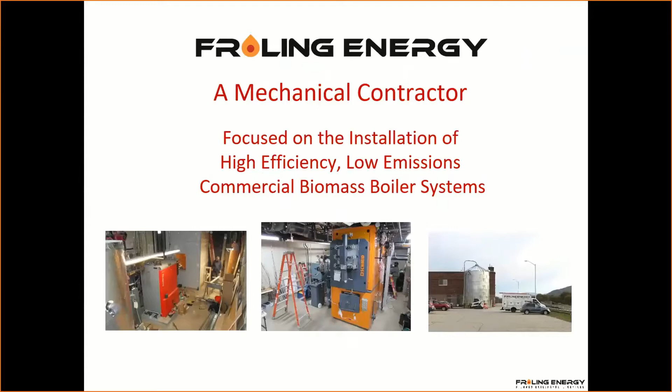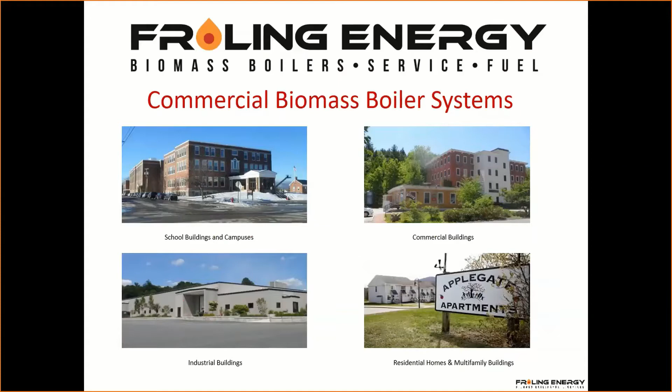Wanted to tell you quickly about us, that we are a mechanical contractor focused on the installation of high efficiency, low emission commercial biomass boiler systems. Those are generally of the larger size systems. We often put in residential systems in the course of a year, we'll do 5 or so, but we tend to do 5 or so big projects like some of the things you see here. We tend to do a lot of school systems, a lot of school buildings, going into their boiler rooms and renovating completely, pulling out old boilers and installing biomass. Sometimes we're adding other equipment, and sometimes we have to build a building for those boiler systems. Commercial buildings, industrial buildings, multifamily buildings are very popular as a good place to apply this kind of technology, because we're generally talking a big boiler that provides heat for a number of different locations. On the other hand, residential or individual small buildings are very popular for the pellet boilers, which we'll talk about today.

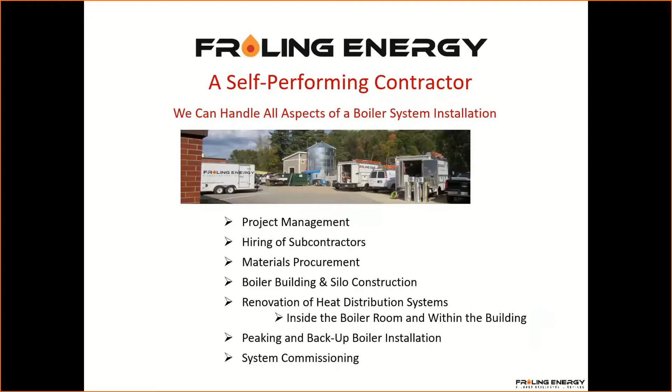We're a self-performing contractor. We can handle all aspects of a boiler system installation. You can see in this picture here, we not only put up the silo and put in the boiler, we built the building and then we put the pipe into the building because this didn't have any room in the boiler room. So those kinds of things, including hiring of subcontractors and getting all the materials in place, going into that boiler room and doing the demo and replumbing everything. It's a big project, and this is the kind of thing that we do. We wouldn't do an addition onto your school and the boiler, we would basically just want to do the boiler and maybe the boiler room. So we're focused on that sort of thing. Another thing is technical consulting on biomass boiler systems.

Anytime you have, if you're an engineer, a designer, or a building owner, a facilities director, you want to just understand what's possible for your building.

We're very happy to help you with feasibility, do a site visit, help you with the design, estimating it, finding out if this is a viable thing, and talk about the payback on this. What's the ROI? Does it make any sense? The value engineering side goes along with that, where we're trying to make sure it works, both financially and physically functional.

Help you with specifications, grant applications, is another thing. Very often we're aware of different grants that are available, and we're happy to consult with you about that and assist you in getting those.

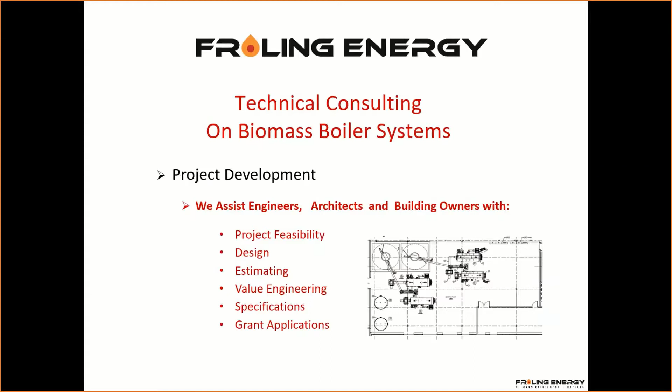We're also, besides being a contractor, a manufacturer of PDCs, which are precision dry wood chips. What we do is take in chips from the woods. A lot of foresters out here have low-grade wood, they select out the bole wood, and we take it in and screen it, bringing it down to a size about the size of a matchbook, and then we dry it. We have a belt dryer, a big industrial belt dryer that brings it down to 25% moisture.

And then we can load it into our big blower trucks, which can blow it up into these above-grade silos. And that's the advantage of the dry wood chips, it's in between pellets and green wood chips.

The system can be costly, but actually if you were going to do it with pellets, it's not that much more expensive than a pellet system of similar scale and multi-million BTU size, which is what we typically work in. That's the scale you'd need to be able to cost justify the change to a dry chip system.

There's a lot to talk about there, and we've got videos about this. It's just something that we found as a niche, and we've really developed it here with some 20 customers now that are offsetting over 600,000 gallons of oil every year using our dry chips. So we're pretty proud of that.

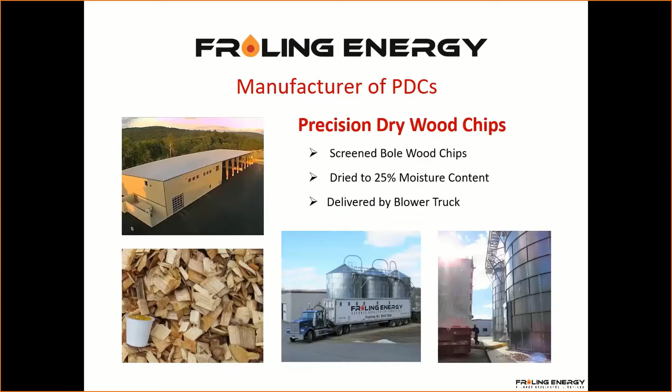That's not big compared to the number of people burning pellets in all different situations. I'm sure there's a couple million gallons of fuel oil that are no longer being burned as a result of people putting in pellet boilers. And nobody's put in more pellet boilers than Maine Energy Systems, so I wanted to introduce Jared Mullen, who's going to tell us all about that.

Jared is the Vice President of Business Development at Maine Energy Systems. We call it MESys, so you see that a lot around - it's a nice, easy way to say it. He's a graduate of the University of Southern Maine, where he studied business, and he spent many years on the sales of MESys boilers at the Maine company. One of his most significant achievements was overseeing the installation of over 150 boilers in Berlin, New Hampshire, and Farmington, Maine, during what they called the Model Neighborhood Project, a partnership between them and the Northern Forest Center. They were encouraging and stimulating that market, getting these out in the field, and that was a wonderful start, a good number of years ago, on getting people to really accept this as a way to heat their homes.

He's also been a committee member on the Northeast Biomass Heating Council, and he's been burning wood pellets in his home since 2006, when he began working solely with those pellets in his house. He enjoys spending time with his wife and three children, and is very active in his church and community.

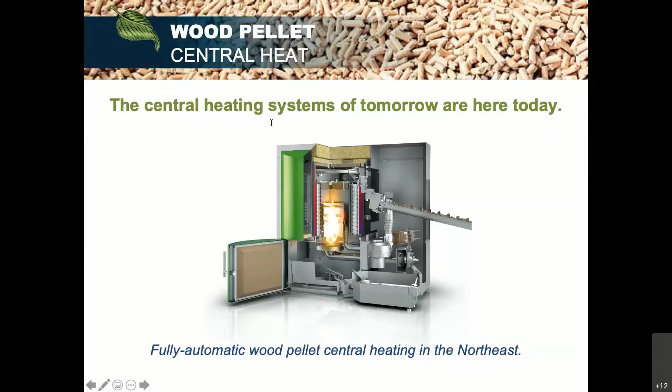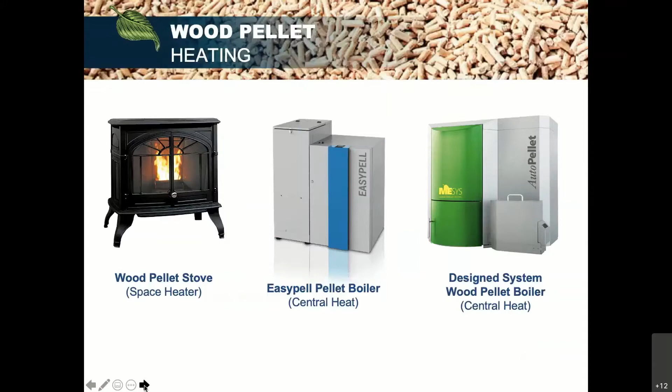Pellet heating started off, and most people think of stoves and other different types of equipment. As we advance the slides here, bear with me. Pellet stoves, we've got space heaters - that's what the majority of people in the marketplace are familiar with. We also have hand-fill units, and of course the designed wood pellet central heating systems that we'll talk more about later on.

Like I said, most people are familiar with these - just a space heater, dump bags. Usually when I walk into a room or give a presentation, like Jim and I have done so many times, most people are asking us about this because it's their impression of what pellet heating is, because it's what most people are familiar with.

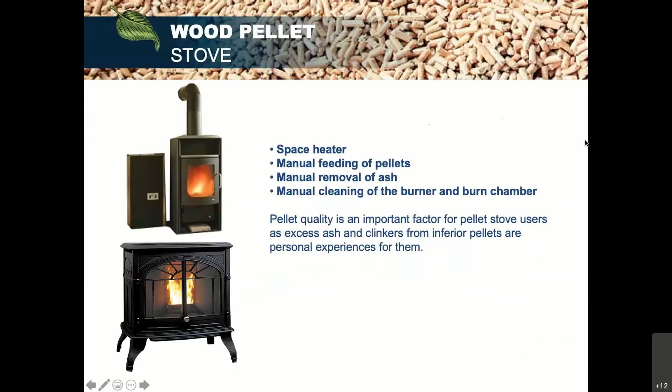We do have a step up from that here at Maine Energy Systems. We have what's called the Easypell. Not a space heater, it is a boiler, but it is something that you would dump bags into, similar to a stove, and then it has manual cleaning and some manual things. So the unattended use period of time is not particularly high, above that of a stove, but not as great as the boilers we have that are fully automated. But this is a good fit - a lot of people find this far easier than cordwood, and think it's a good alternative to going fully automated.

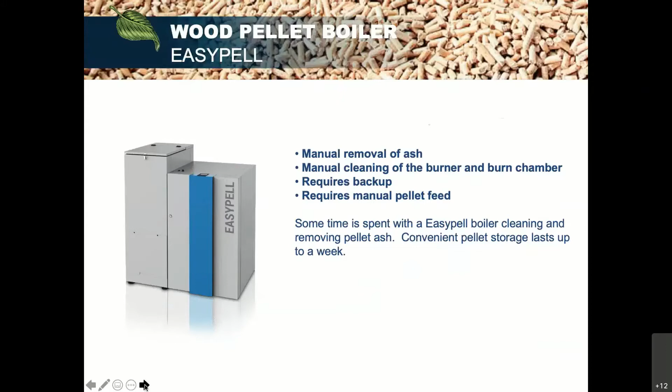But we do have systems that are designed all the way from the boiler to the bin, and we're not quite as easy as a liquid fuel, but pretty darn close, where trucks are delivering fuel just like oil and propane. You never have to see, touch, or handle pellets, and there's just a little bit of ash that needs to be removed, but they clean themselves. There's no scraping or shoveling of ash, and of course they can be installed without a backup.

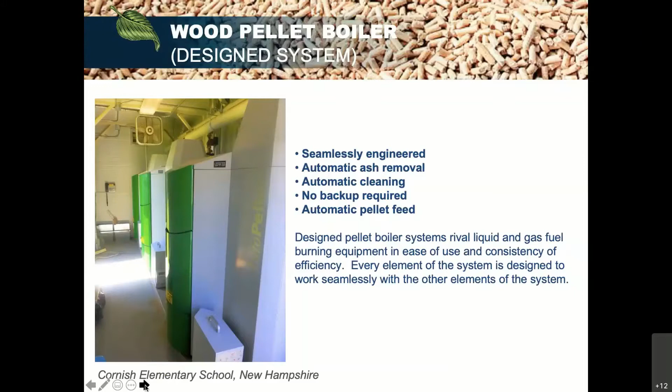These are the bins I've been talking about, pellet storage containers. We offer so many different sizes to help accommodate different houses, different commercial spaces, schools - different places to put these bins so that they can be fed to the boiler automatically.

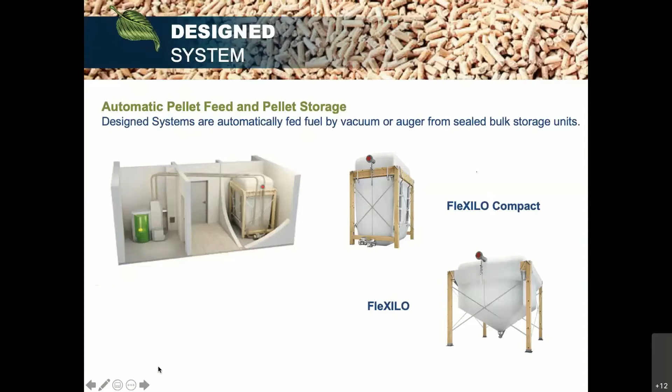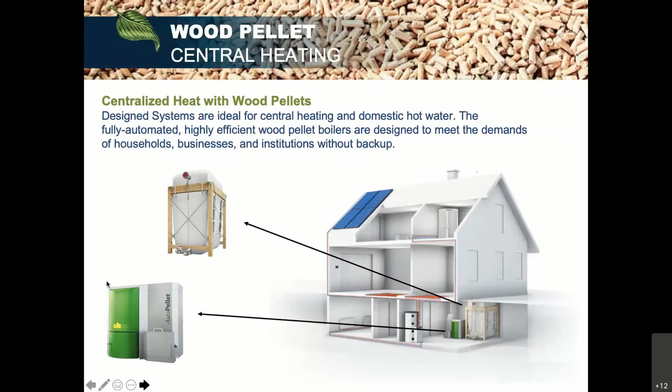This is just showing a diagram of the flexibility of these things in a home. Again, we are typically a residential unit. As we'll show a little later in the presentation, we do have some versatility for small commercial and industrial applications, but when people think of the Maine Energy Systems boiler, we've been most popular by far in the residential market. So you've got your pellet boiler down in the basement with your pellet storage. They can handle radiant flooring, radiators, domestic hot water, and meet the demands of any home without requiring a backup.

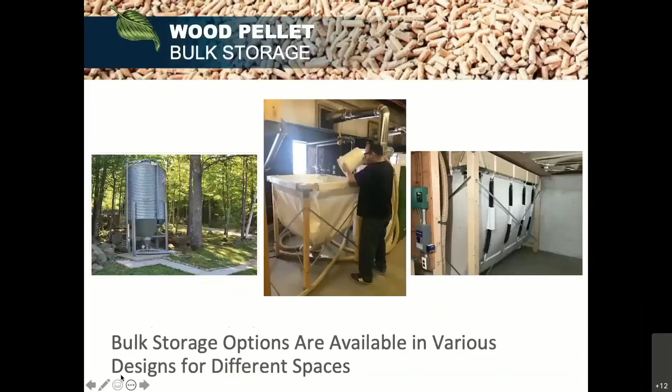That operation, we are on truck number 10. We've been doing that since about 2009, 2010 is when we've had trucks rolling on the road.

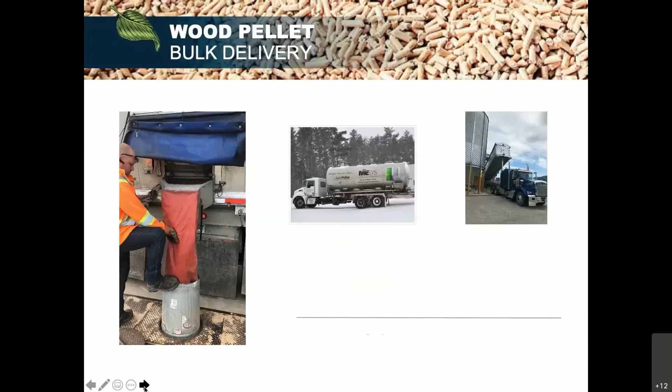There's lots of pellet mills up here in New England, in the Northeast. You kind of see them all over the place. That's a question we often get asked, about how the supply of pellets is stable, and as you can see, we've got a lot of different places to draw from. Us in particular, we mostly get ours out of Strong, Maine. That's the closest in proximity. Keep it local. We also have a pellet delivery depot down in Massachusetts that gets their pellets out of Jaffrey, New Hampshire.

Another example of pellet delivery, and there we have one delivering right to a silo. Some things to keep in mind when designing a system that is going to accept bulk pellet delivery: we do carry 90 feet of hose on a truck, so you're going to want to put fill systems within 90 feet of where the truck can pull up and drag their hoses.

The pellet hoses certainly weigh more and are a little harder to move around than oil hoses, so as close as we can and as easy as we can, in places that are well shoveled or protected from kids if we're at a school site or something like that. We can go 25 feet of rise if we need to deliver pellets, and we have standards that have helped streamline things so we can make this a little easier on our drivers and on those who are receiving fuel.

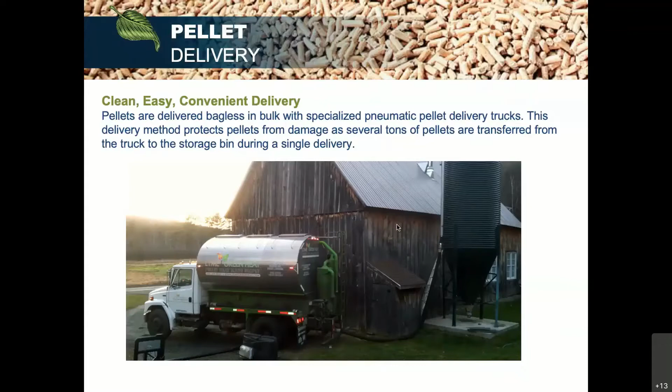We do have certified scales on all of our trucks, so although bins and silos are typically measured in volume, we actually deliver based on weight. Pellet density does vary from time to time, but typically we see it average around 42 pounds per cubic foot. We weigh the truck before and after, and we charge by the pound. So sometimes your bag or silo may look more or less full than another time, depending on the density of the fuel, but it's usually pretty consistently pegged between 40 to 44 pounds per cubic foot. We have certified scales that will tell you exactly what we sent you.

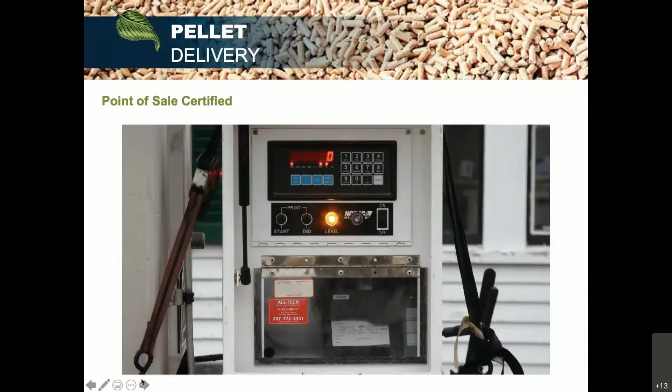I think we have a video here, if that will pull up, of us delivering. A lot of people haven't seen it. I think this one in particular illustrates one of our fabric bags.

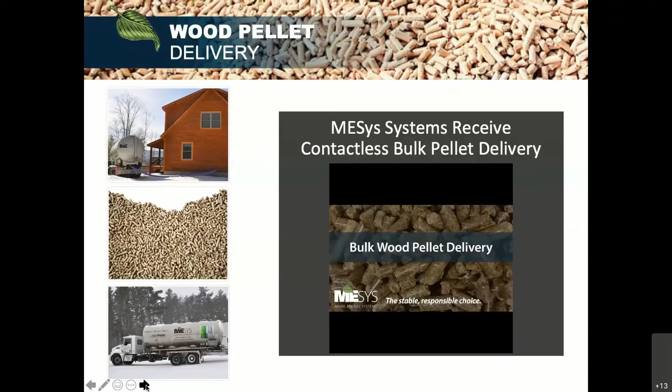So we have obviously different types of pellet delivery, and some are better than others. These design bins would be best. I'd say a silo would be next best, and then anything handmade that people tried to construct on a whim are probably next as far as reliability. So with these we've had the most success, right behind that a silo, just barely behind in reliability. You can see that bin, and what you can't hear is it sounding like a rain stick as the pellets are delivered into the bin there.

We do Maine Energy Systems. We initially started off as a direct importer, then we bought the licensing and manufacturing rights, and we are assembling equipment right here in Bethel, Maine.

We're getting stuff from all over the place. Typically the heat exchanger is coming from Pennsylvania, electronics are coming from Texas, and other componentry is mostly still coming from Europe, but we are putting them together right here in Bethel, Maine, and of course fine-tuning and Americanizing every piece of equipment that goes out the door.

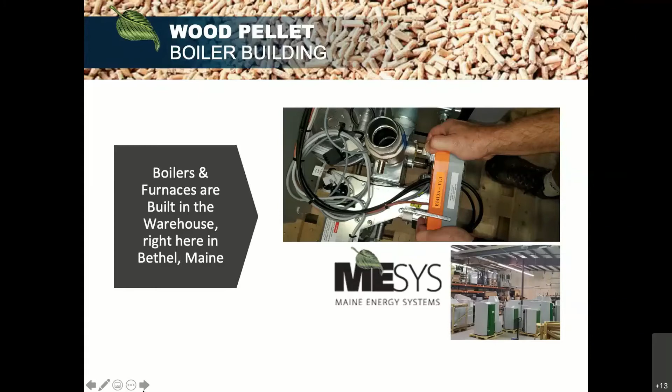We have several different models, and of course boilers and furnaces. That's part of our new line there that does hot air.

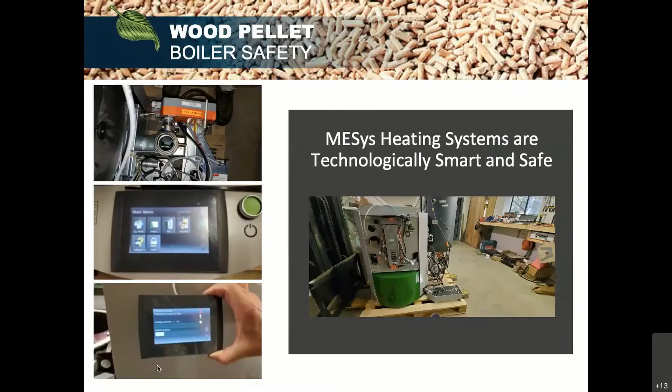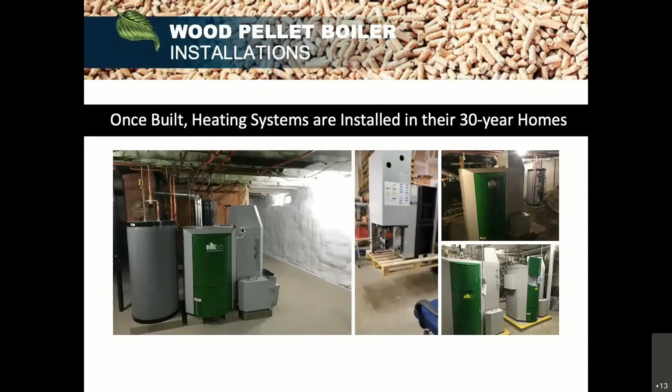Bear with me here just a moment. Oh, what's going on here? We are having problems connecting to the network. Bear with us just a moment here. Is that going? There you go. Got it.

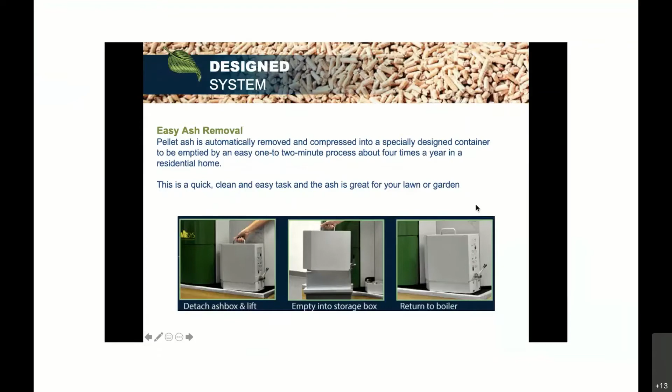And it did advance there. One of the things we talked about earlier was the convenience and similarity to liquid fuel. One of the byproducts, of course, of burning wood is ash, so that's one of the differences we have, and a little less convenient. But everything gets compressed and augered into an ash box that is very handy. It is external to the boiler, which makes it really nice and easy to dump and dispose of in an easy process on our systems.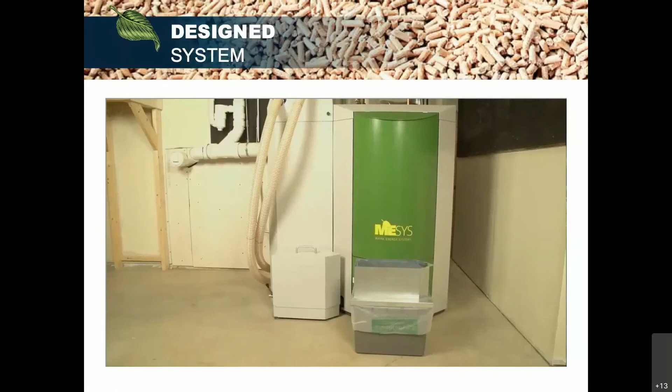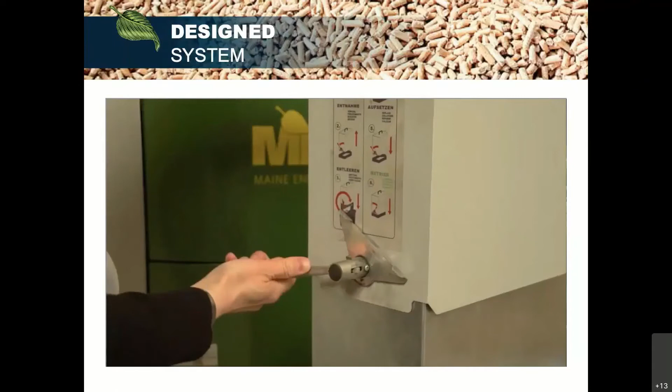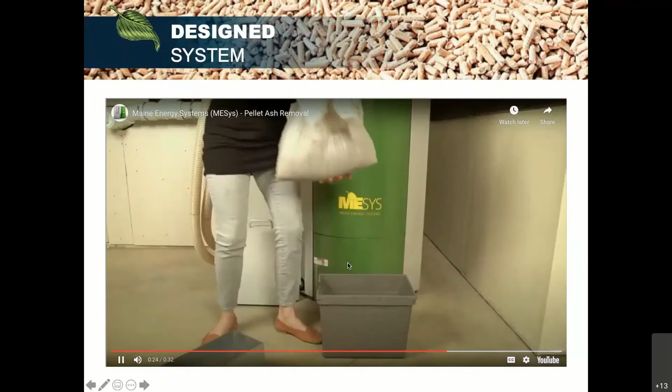We're talking about the Maine Energy Systems pellet boilers with ash removal that is easy and seamless and only needs to be done a few times a year. Anyone can do it, even in your Sunday best, as we have Veronica here demonstrating just how easy and short the process is. I will say, she does it awfully quick, but when you put it on that container, it is a little dusty, so I'd let it rest on there for 30 seconds.

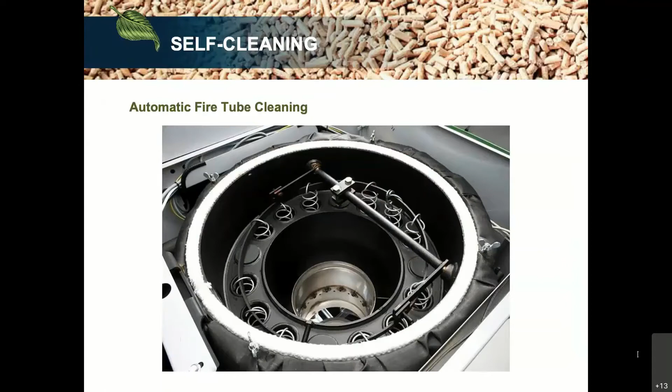And our boilers are designed to do this twice a day. It does not interrupt any of its runtime at all. It just does that while it's running, and works nicely, twice a day, to maintain its efficiency and keep it nice and clean.

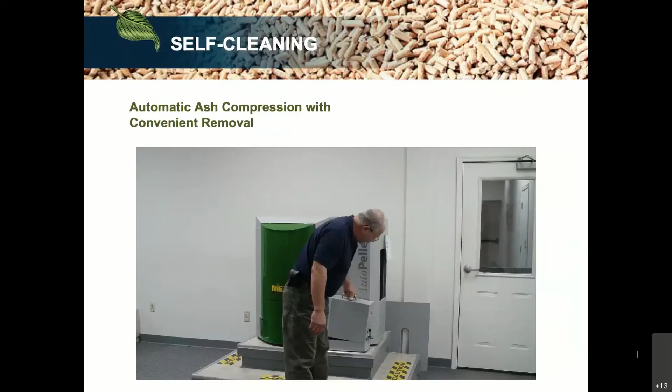Here's another example. That is actually our in-house engineer, Dan Wheeler, and even he can figure out how to do the ash, as I give Dan a hard time.

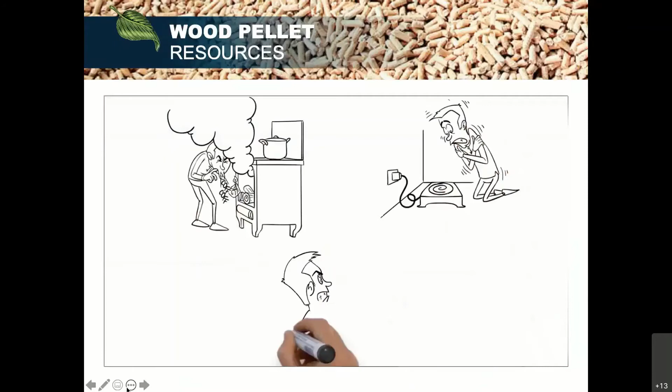This video will not have sound, so we might have to skip it, but we'll watch it. It's a nice little whiteboard video that we made just showing the whole process about wood pellet heating and what these systems do.

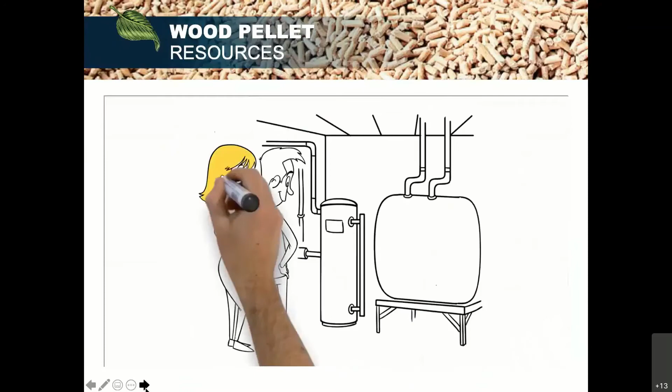And you don't need to freeze. You can get a wood pellet boiler and it'll work to heat your entire home. It is a nice little summary.

These vacuum lines. So when you are looking at these systems and thinking, okay, where can I put my pellet storage? You know, doing an outdoor silo, or a bin in a basement, or trying to figure out where to put it, because obviously pellet storage is a big thing.

The good news is these hoses are 85 feet. That is the length, probably the furthest that we would want to be from the pellet storage. You won't get the full 85 feet, obviously, because you've got to get to the boiler and to the system. We can go up about 9.5 feet of vertical with this hose, straight up, either right out of the bin, right out of the silo, or whatever.

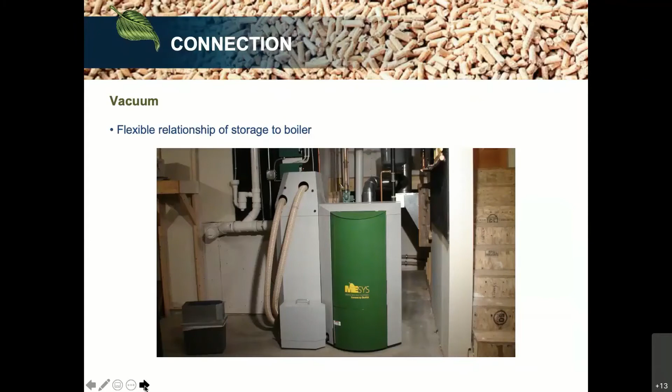And then, of course, if you need to bury the lines, you can. We recommend that you bury it in an electrical conduit. But about 85 feet, and it's still going to work fine for that.

And the 9.5 feet can be cheated. There are tricks to do that with pulsing. And then, of course, you can interrupt it with a 4-foot horizontal in there and then go up again. But 9.5 straight up is about all the tolerance we have.

This right here is sort of the design of our burner and what makes us a little bit different. As you can see here, we have an underfed burner. A lot of the boilers that you see will be horizontal fed or top fed, in particular with a pellet stove. And I don't know if I can use my cursor to show a few things here.

But self-feeding, you can see right above that ball valve, or that orange thing, there's a ball valve there where the pellets are going to be dropping down into, and then going down into the silver tube, and then coming up on the burner plate there as my cursor catches up.

Combustion is going to be happening right there. What you can see there is the ignition rod, that's where the light is happening. And we have sort of a unique ignition cycle.

So obviously when you first fire it up, we will use that ignition rod, and that is what we would call a hard start. But one of the nice things about that is those pellets will remain on that burner plate, sort of smoldering, when the building that these are occupied in comes up to temperature and the demand is satisfied.

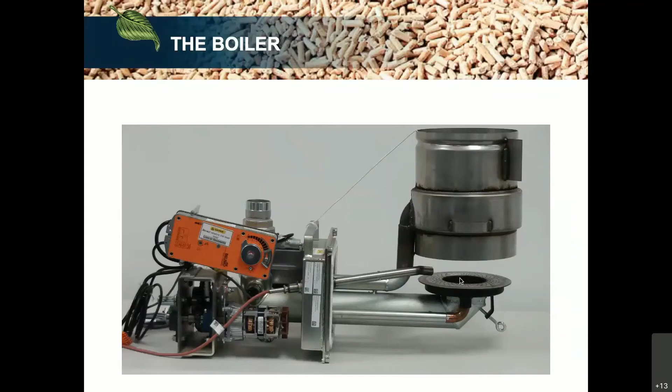We're not having a hard start every single time. We're having lots of soft starts throughout the heating season, igniting what we have there. Then, right above where we're burning on the burner plate is our burn chamber gasification. That's where we're reaching our 1200 degree temperatures.

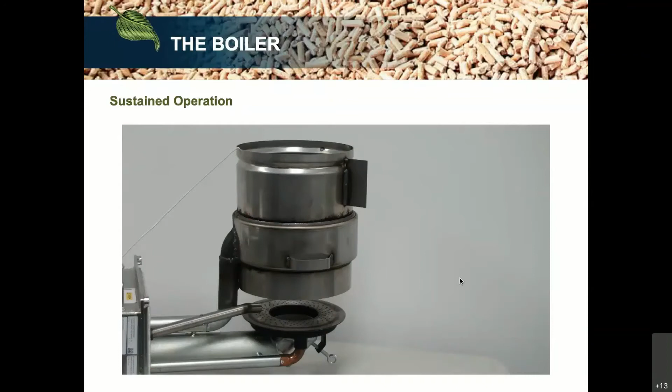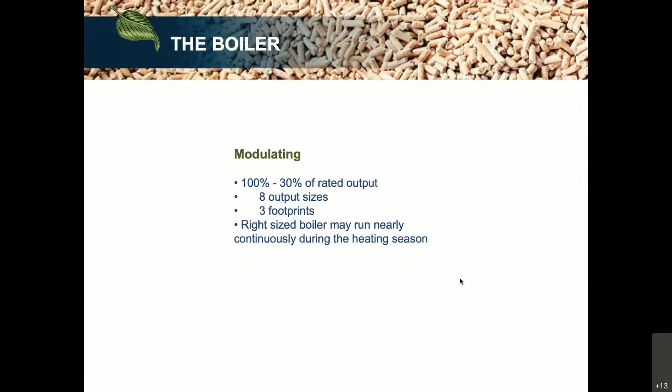We do have modulating systems that range, so we can burn as few pellets as possible, anywhere from 100% all the way down to 30% turn down. We have 8 sizes, 3 different boiler footprints. Next I want to talk about the larger footprint that can be used.

Here's a quick slide on the low emissions. We did pass the phase 2 certification, and we're at like 0.04 in our particulate.

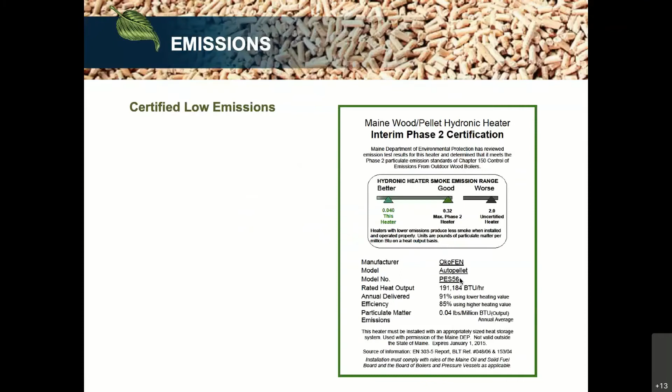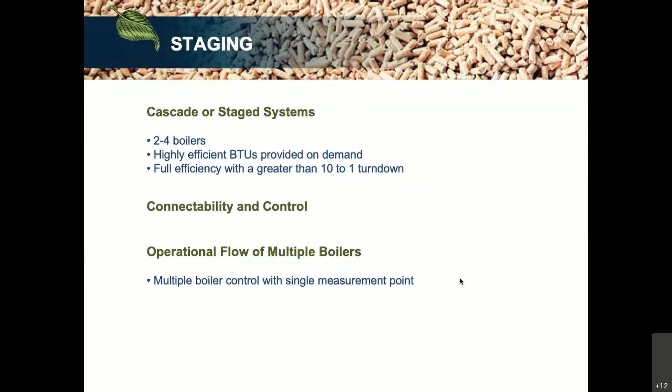But on cascading, as we've talked about before, residential boilers have been popular, and there's far more opportunity in the commercial market that we saw and set out to address. But we don't want to be excluded. We're able to cascade the larger footprint, in particular 2 to 4 boilers. We've found that beyond 4, other pieces of equipment are usually more economical, so 4 is typically the limit, and that's what our controls allow, what we call staging together. We do have systems larger than 4, but 4 is typically where we are. Some benefits: you have redundancy, and when you have multiple boilers you get great system turndown. We find these staged systems work very nicely.

Let me show you the flexibility in the installations we've been able to put these in. We have primary homes, but also Mount Abram Ski Resort. We've got a lot of churches that have done these, and we can do far more than just residential.

Some of these even Jim from Froling might recognize. Here we have the Harris Center. This is one 56 kilowatt boiler, about 200,000 BTUs. The building is about 10,000 square feet, and they're burning about 12 tons—a really nice installation that Froling was able to do.

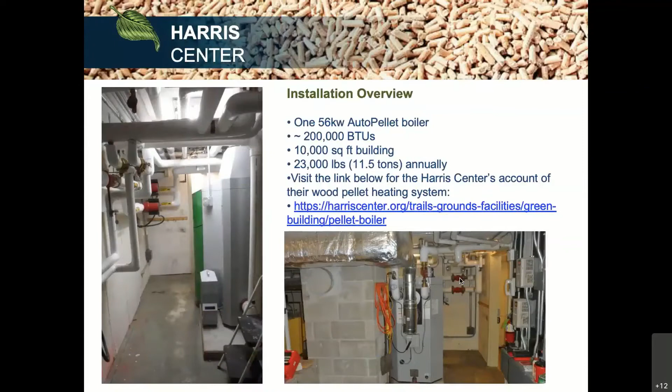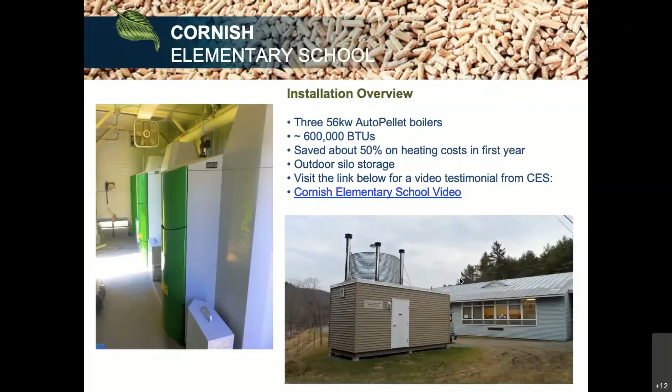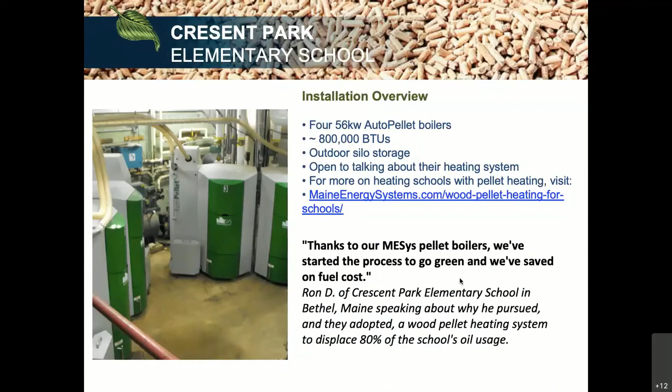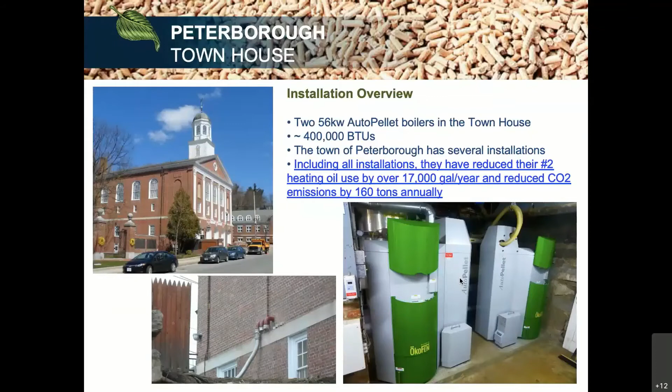Here's a 2 boiler system, about 400,000 BTUs, in Peterborough. Peterborough was and continues to be a major installation spot for pellet boilers. Beautiful install done by Froling Energy, and they've been very blessed to offset a lot of their heating oil and reduce their CO2 emissions. These have been installed long enough that you can see the ÖkoFEN logo on the green instead of the MESys, from when we were directly importing. They've been running for a nice long time. We commend Froling for their wonderful installation work there.

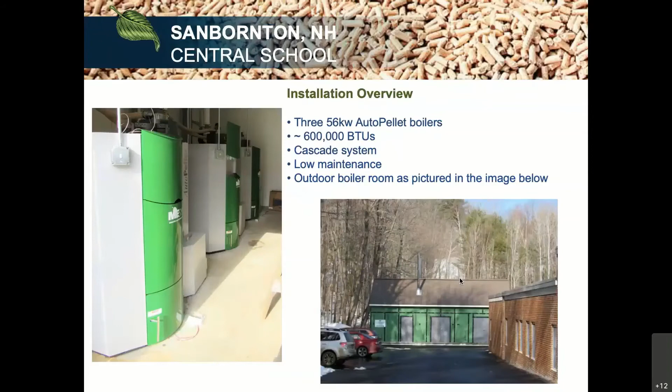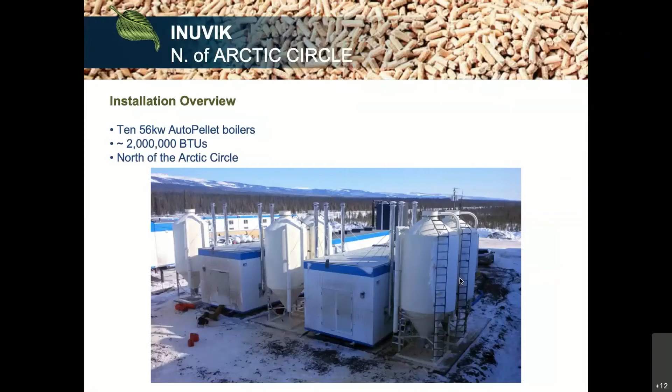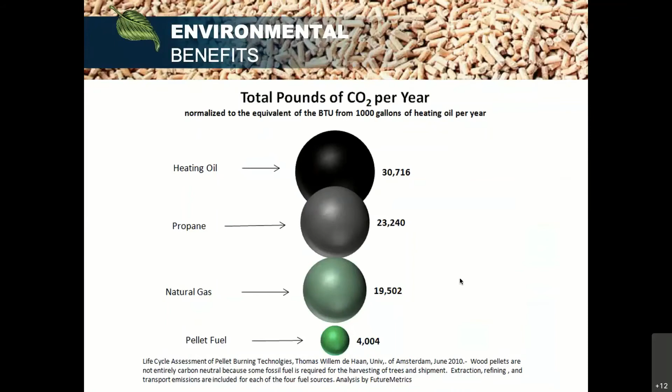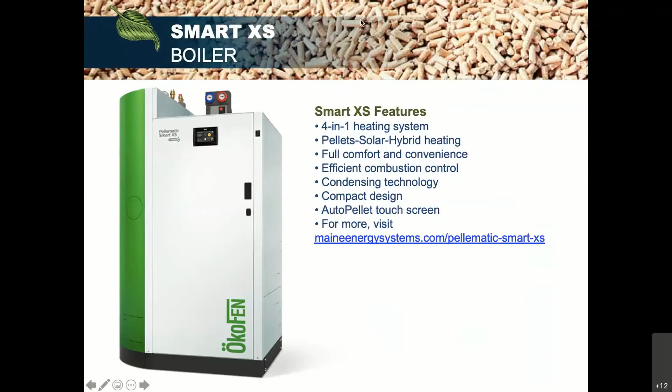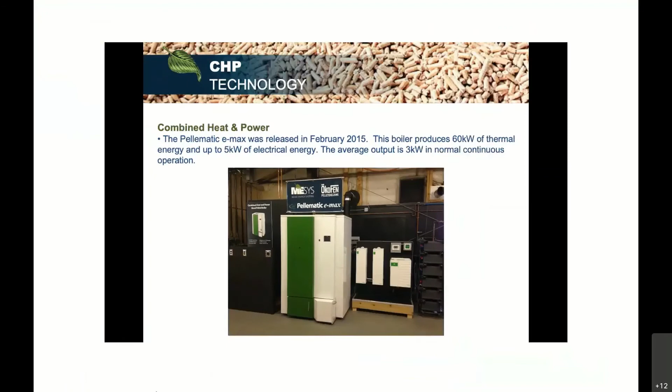Additionally, this product—I'm not sure, it was one that we brought over, we were really excited about it, I don't know what its future holds. The Smart XS obviously has a place, but this is the Pellematic e-max. It is a CHP boiler we've had for quite some time. We actually had it at a conference in Washington, D.C. on the Mall, where we demonstrated it for people to see. It produces about 60 kilowatts of heat, and can get up to 5 kilowatts of electricity, though probably continuous output is more like 3 kilowatts. What we have found so far—we have a couple in the field, but they are in sort of research type settings—is they're too expensive and the heat to power ratio is too small.

This is done by a Stirling engine, which rests—if you can visually think back to my slides there where we had the combustion chamber tube that resided just above the burner—this would sit above that, where we have our 1200 degree temperatures. The Stirling engine head would go down in there and use that to power it. Stirling engines, though, are incredibly expensive, so this unit is about 60 grand, and that doesn't include any batteries that you would want to be charging.

So that setup would need to be in place, and that doesn't include any installation. And it is a bit more challenging to install than a typical unit. So where this thing holds in the future is unknown.

There are a few there. It does not currently have its U.S. certifications, so it would need to be for a research facility. But it's something we played around with for quite a while, and we do have it to heat our warehouse and the availability to charge someone's electric car if they came to visit us here in Bethel. We can do that for you.

But it is a unique concept, unique idea. Might not be quite there yet, but there are some that have said, we don't care, we want it, we need it, it's too cool. But there's only been a handful so far.

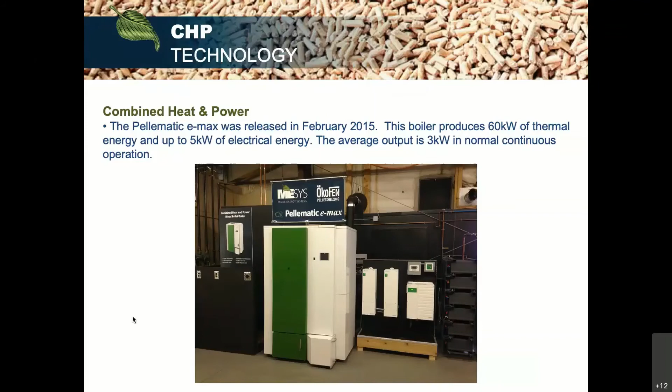Of course, just to touch upon this - obviously when we're looking at this stuff, it's really neat and shiny, and that also means really expensive. But we are fortunate enough to have rebates in just about every state up here in the Northeast available to help people offset the cost of these.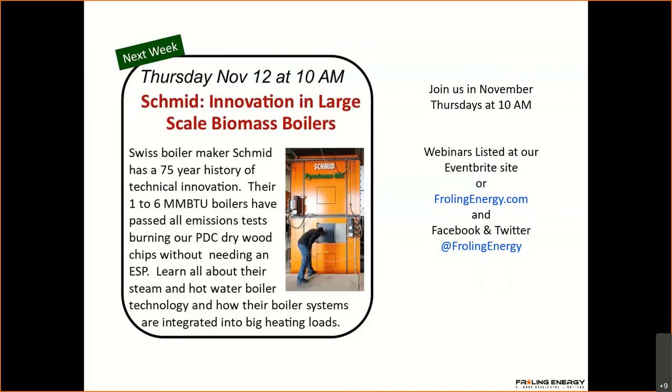This talk is going to be given by Marcel, the representative from Schmid, from Europe.

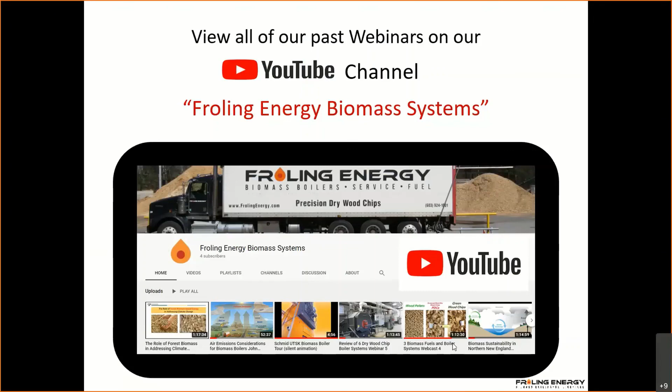One of the neat things about pellets is that it's a very flexible installation—I can put the boiler over here and the silo over there, and have options for filling where I can blow it in. There are all sorts of options, whereas chips start to limit some of those options. That presentation will tell you more about that.